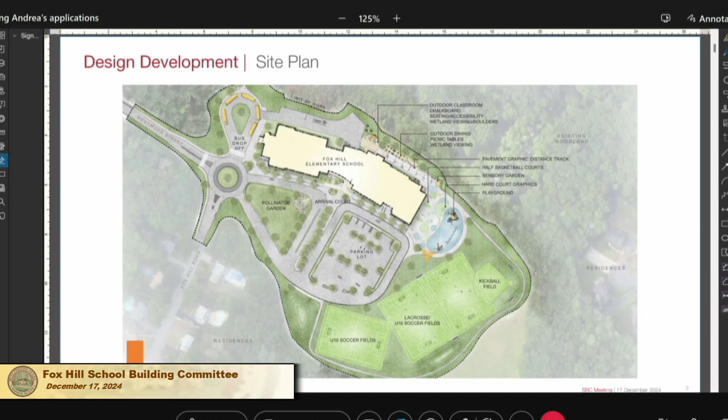site plan. Slide. Again, the traffic is very similar. This is the new alignment, so you'll notice the lines are a little bit different where the curbs are, but the traffic flow is essentially the same.

There will still be stop signs as you exit the parent drop-off loop and the van loop, as well as the bus loop. So essentially, a lot of this is the same as we've been showing it. We just updated the site alignments.

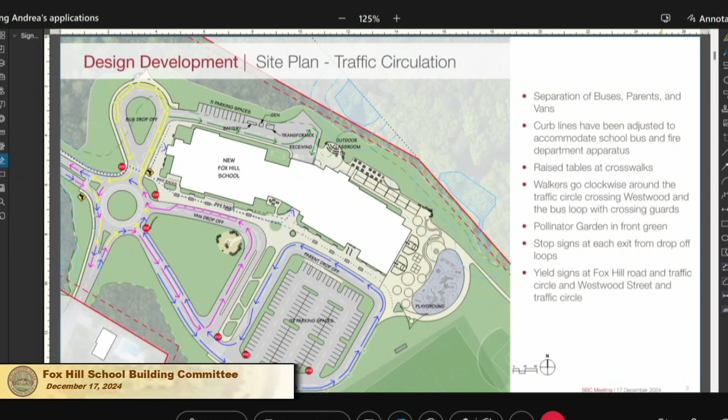Okay, next one is, so yes, we just want to give you a little bit of an overview with the updated model based on this revised site work we're looking at.

One thing I didn't mention is that we're looking at putting a pollinator garden in that triangular green space out front, so we think that'll be a great opportunity for some outdoor learning in front of the school. It'll add a little life to that green space as well.

We're also continuing to develop the site design with landscape, so this shows a very basic lawn. There's a lot of green, but it won't all be lawn. We're also looking at how to make sure the softscape, the landscape, is as maintainable as possible, as well as providing enough space for snow clearing and snow storage.

So while it looks very green, there are going to be many areas where there's just plant material and mulched area, so it won't all be grass.

Vivian, Martha had a question. Yeah, I'm just wondering,

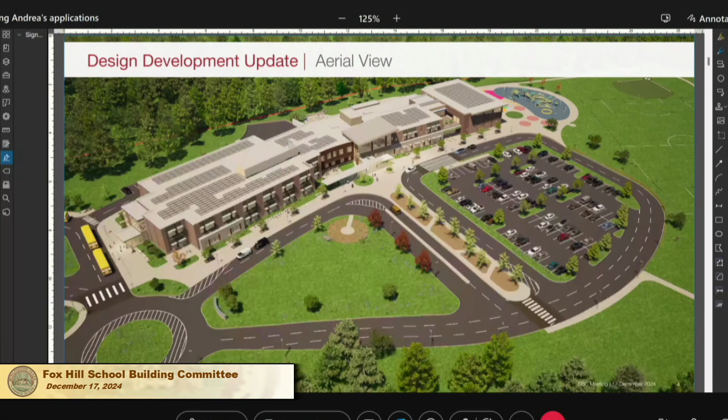There was talk very early on about trees in the parking lot, which has its appeal because trees are good and because shade is good. But if we're going to have the potential to add solar canopies into the parking lot, does that mean we wouldn't be putting trees in?

Yes. And we could put more trees in that front lawn section where you're talking about putting them, so is that the plan? Yes, it'd be trees or solar canopies.

You couldn't do both. Okay, so I just wanted to point out that I'd like to have solar canopies, and I hope other people do too. And there are opportunities, once we wrap up with the PPA and determine what the amount of production needs to be for net zero, it could be that you leave a couple of areas along the perimeter open, and then you can also provide trees in those areas.

But I think we're waiting at this point to finalize the quote from the PPA, the folks who would do the solar canopies on contract.

Okay, so my understanding is, I know this was true for residential, but you're not really allowed to install more solar panels than would provide more energy than the use of the building. Is that true for a school as well? I don't know if that's true or not.

So we still could have more, even if, and you're saying you think we may reach net zero with the solar panels on the building? No, no, no. We'd reach about 40% of building use.

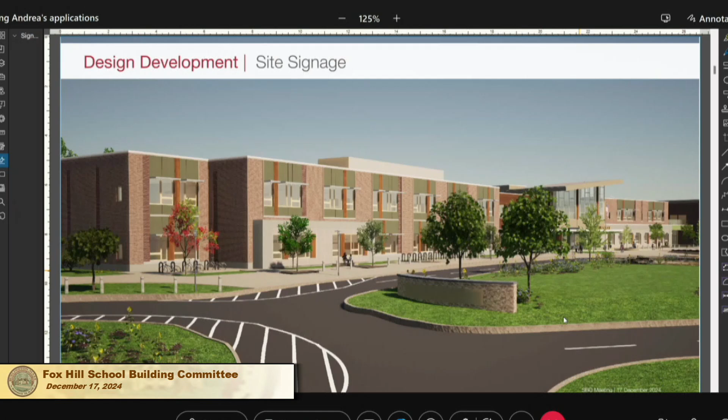As long as it doesn't look too inviting to go to the left of the sign. Unless you're just going to Westwood. Fox Hill, with the fox tail pointing that way — that would be good, like an arrow, right?

So last time we were here, we talked about different canopy options and heard some feedback from you, so we wanted to show you — we did some additional explorations. These are four new options we looked at in more detail. I kind of settled on the one in the lower right. It extends the canopy a little more towards the van drop-off, and it's about 100 feet long, maybe a little over.

Previously we showed a glass canopy, and we reached out to our cost estimator — the glass canopy would be significantly more expensive, so we've decided to pursue the more reasonable opaque canopy, built mostly out of steel. So let me show you some pictures of it.

This is kind of a view - we're still looking at the color, but you can see it'll have columns about every 16 feet, and it's about 10 to 11 feet tall. It slopes up a little bit with the structure, and we like the way it mediates between the building and the parking lot, giving a little foreground at the front of the building. That's the current status of the canopy.

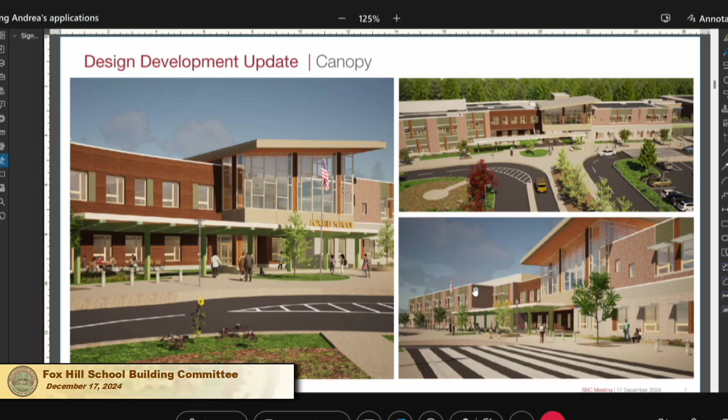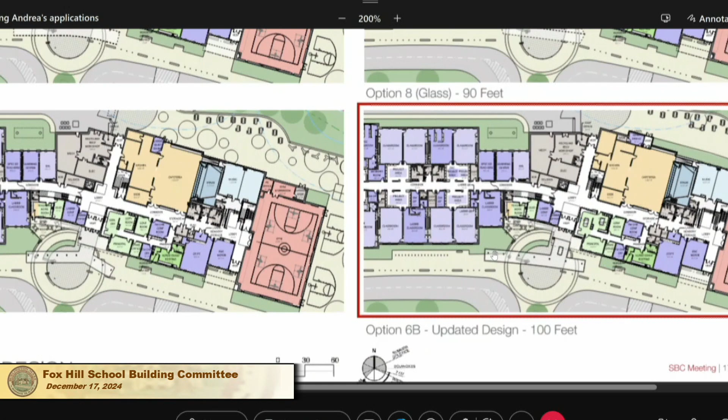No, it's freestanding in front of it. Let me go back to the plan - I just thought the way the shadow fell, it looked like it was attached. That would also give more protection, but it also makes for less natural light. The building is set back quite a bit there, so the perspective view makes it look closer than it really is. Just wanted to know what I was seeing.

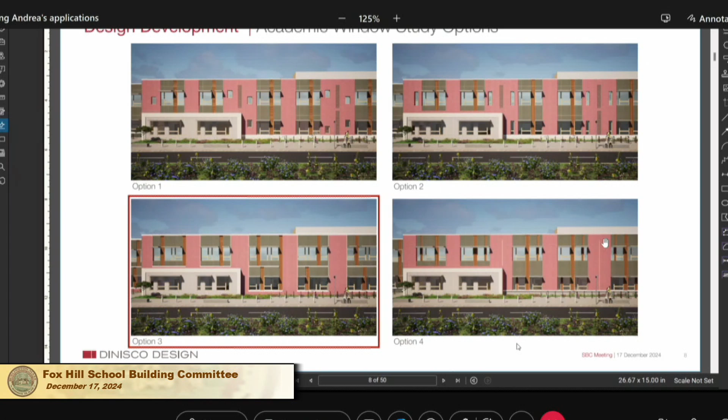For the exterior windows, we showed a few different options last time and have settled on this simpler pattern where it's mostly masonry with some metal panels and windows, with a little phenolic in between. This is the look with the horizontal sunshades we discussed last time as well.

From the inside, you get a lot of nice windows, a little over 100 square feet in the classroom, so we think it'll provide a lot of light in these spaces for the kids. They're set high enough to get good daylight, but also high enough off the floor so teachers can place furniture in front of the windows - we know there's a lot of bookcases and bins the kids use during the day, so it's a good balance.

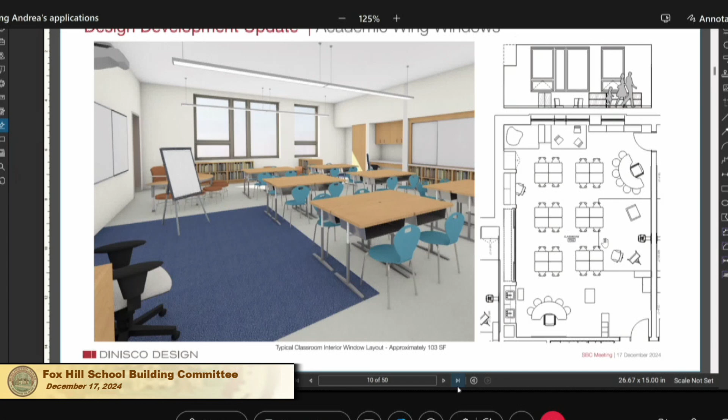What we're doing with the window patterning is looking at the most efficient layout possible while creating a bit of playfulness with the pattern. A lot of older schools have all the windows stacked one on top of each other, but here we're using the materials to break it up so it's not the same repetitive pattern across the building - it's a fairly long building, so we're trying to break up that scale a little.

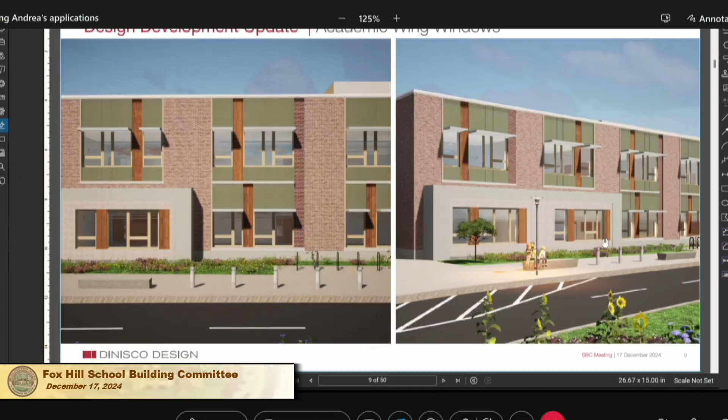So you can kind of see - through the chair, are they able to open the windows? Yes, the horizontal low one will open, like an awning window. But the other ones will be fixed, so it's a balance.

These horizontal solar sunshades remind me - is there a conversation being discussed with the PPA or whoever is designing solar panels about the possibility of solar panels as awnings? We talked about that very early on. Is that something being considered? Maybe it's a better idea, maybe not, but I want to know if it's being considered. I did bring it up with our solar design consultant, and he strongly discouraged using building elements as solar panels because he sees a lot of failures - they're not as easy to access, and there's a lot of wiring that has to tie back to other things. So he doesn't recommend it. You could do it if you really want to pursue it, but it's not as robust as the ones on your roof, which you can easily replace, and they're odd sizes too. Oh, it sounds like it's much more complicated.

We did look at that - we looked at even putting it in windows. There's some places you can put it in the glass itself.

Okay, I think last time we also talked about the bus drop-off. We've been looking at it - we made the building a little smaller because we simplified the stair, then looked at a bunch of different options and settled on this one to the lower right, which has a little less glass. This is a more developed view of it.

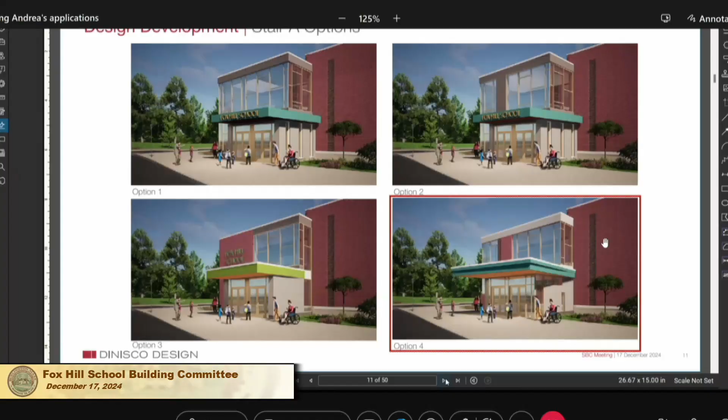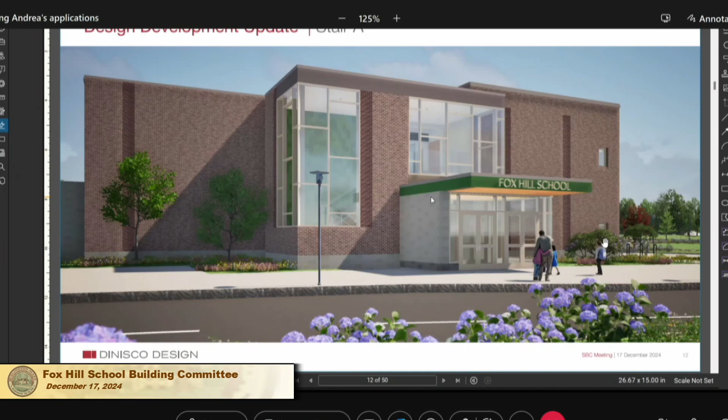It'll have a large curtain wall in the corner of the stair, and a curtain wall at the end of the corridor, and the vestibule part has a lot of glass so you can see the buses. If you're inside that area waiting for the bus, you can see out and see all the buses when they come. We thought that was important, so kids could see when their bus comes if they're waiting out there.

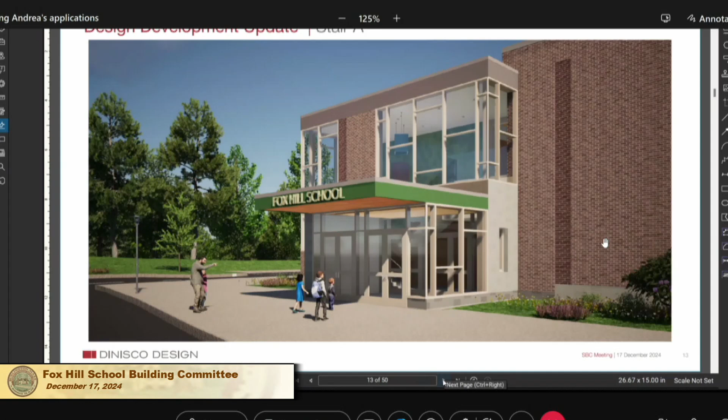So this is still developing. The gymnasium, as you'll notice, looks a lot like it did in SD. We've just kind of refined it a little bit, reduced some of the glazing.

A lot of it is the masonry. We just have a clerestory up top. We've extended the roof a bit, like a 6-foot overhang, to kind of shade the southern side so that during the daytime you don't get

glare in the courts, which we know is a big problem. So there's a couple of little punched openings down low, so when you're in the gym you can still see out and see some of the sky. And I think we've also adjusted where the doors are out of the gym so they're less in the way of the basketball courts. So they're more towards the corners. Those are the 2 doors needed for egress from the gym.

Question through the chair. I know, like when we toured the school over in Woburn, Hurld-Wyman, the gym gets really hot. They were complaining about that. So when you talked about the overhang, is there something to shade those windows to keep the sun from coming in and beating? Is there something we can do? I don't know, electronic shade, something to keep it from getting so hot?

We have in the past done stuff like woven stainless steel mesh on the exterior, like a fabric. It looks like a fabric almost, and that can cut down on the solar gain on the window. You get a 50% opening of the metal, so you're kind of cutting down 50% of the heat that comes in there.

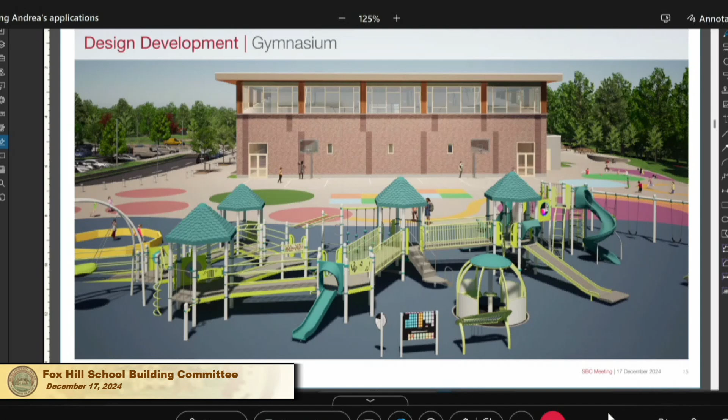Okay, what's next? So we did a little bit of development. This is the cafeteria. I think last time we talked about trays. So we went back to our food service consultant, and he quickly revised the kitchen to figure out what it would take to do a tray wash. Essentially, for trays you need a conveyor-type dishwasher, which is a lot longer, so we had to reconfigure the kitchen a little bit.

So what we've done is taken the reconfiguration he did and used it as a base. You don't have to decide yet if you want to do tray washing, but this will allow you to do it in the future.

It really didn't impact the size of the kitchen much, but it did push the quiet dining out of the building a little bit, about 5 feet. So the volume of the quiet dining came out of the building, and we also added a vestibule so that when you leave the gym or the cafeteria, you go through a vestibule so you don't let all the warm air out of the building this time of year.

At the working group, someone had a great idea: maybe we add something to the quiet dining so it's not such a fishbowl. So we're looking at maybe some kind of frosting or a pattern on the glass so it's not like you're in the middle of a fishbowl.

Question: on the tray wash, is that the only thing we'd wash, trays? No, you'd still be washing everything in there, you just need a conveyor dishwasher. So you'd wash flatware, dishes, and all of that. And you'd have a 3-pot, or 3-bowl, sink in there as well.

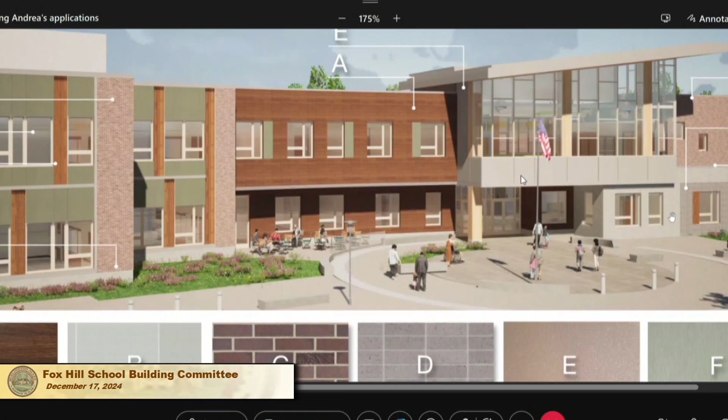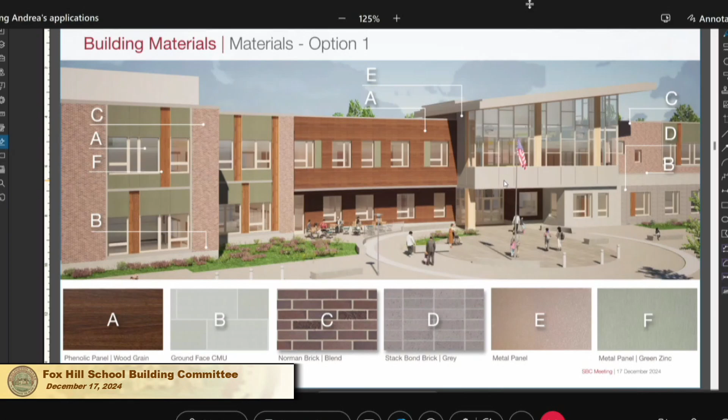Is that also particularly sturdy at the bottom, concrete? Yeah, the concrete's actually pretty sturdy, more sturdy than brick down low, so we like it there. Then the last materials, we have a little bit of gray brick at the kindergarten bump out, and also in the admin area, this color. We might do it in a stack bond, so it looks a little different.

You brought a concrete block over to the chair - there's a concrete block on the floor. Where's that go? That's what that will turn into, right? We have a few spots of dark brick base on the backside. Okay, you don't have to pick that up. You're very brave - bend with your knees. It's only about 15 pounds. But this slide shows them all, though it's better to look at the real thing.

Okay, so we did do a little bit of playground update. Megan O'Brien put together a fourth option, and I think we've shared it with the town, so we just need to decide what we want to go forward with. I think this is the one everybody seemed to like, because the playground's divided into 2 large play structures with some swings between them, plus 5 to 6 independent little structures that spin around or are kind of seesaw type things. The taller, bigger play structure is geared more towards the older kids.

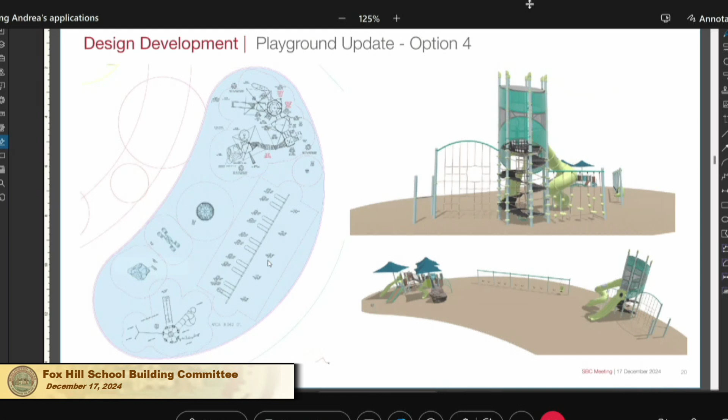That's the smaller one to the left on the lower picture. And then the taller one is geared towards the bigger kids. But I think the intent is that all the kids from kindergarten through 5th grade are able to use both - it's just a matter of how much challenge they want. The structures meet the accessibility guidelines, so folks who aren't able to use their legs effectively can get on and scoot from one level to the other. It's just not 100% accessible for wheelchair access.

We're still looking at all the separate components - there are many different ones, but this is very close to what the school wanted. We met with David and some folks from the school department, and it was really desirable to have structures that are a little bit more challenging than those that are just kind of walking from one bridge to the other bridge.

So that's how we landed on 2 structures. The swings were also really important, so we have a lot of swings there in between the 2.

As Neil said, the freestanding elements are components that David will share with the staff, and they can provide input as well as sharing them with the students. There's an opportunity after the holidays, we'll figure out how to post it so the kids can actually vote to see which components they like the most, so they can participate in actually selecting some of these elements. This is kind of like the group of elements.

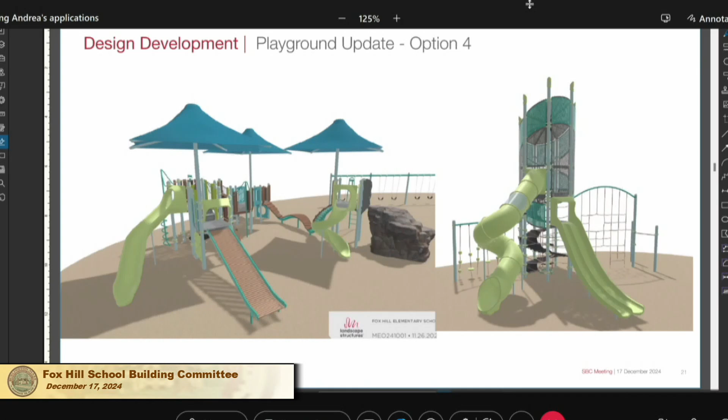Right, and that's important. And also for our staff, it's fascinating too, some of the stuff they've developed. At Francis Wyman, we have a merry-go-round that has a seat that a wheelchair can roll right onto. I've heard some of the teachers enjoy playing on it too, so it's fun for all ages.

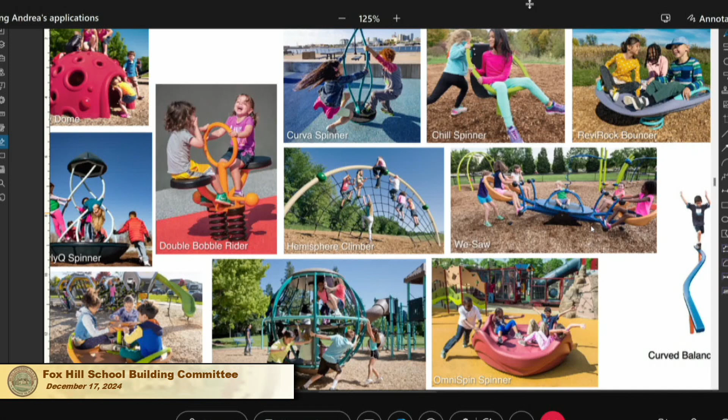So on the screen are many of the freestanding elements, and one of those merry-go-rounds would be a potential option. Have we thought about a platform swing, where a wheelchair can ride right on instead of a student needing to be transferred onto a swing? There may be some of those options, so let us dig into that. There are merry-go-rounds like that too, yeah, the one at Francis Wyman, right.

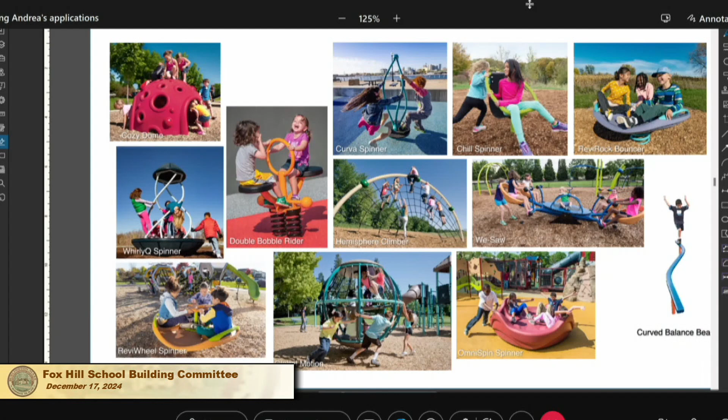I've seen a big mesh globe that's an inside climbing rope structure. I don't know how that fits in, maybe with the one in the center there. Yeah, I mean that looks plainer. Well, it's not plainer, but anyway, that's the idea. They have a lot of equipment, so we'll definitely give the feedback to Megan. She'll be happy to give us some more options. There's more ideas than we have room for, and money for.

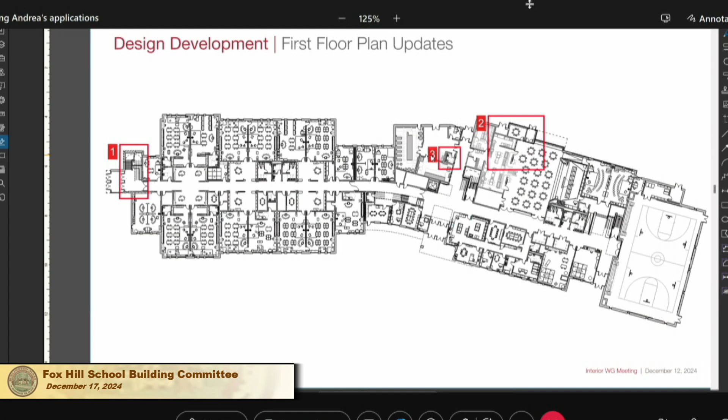All right, so we're going to move on to the interior a little bit. We've talked about some of the plan updates already. We've made stair A, the farthest to the west near the bus loop, a little bit smaller. We've also made tray washing possible now in the kitchen, so that made a change. We've also reconfigured the bathroom in the loading area, so it's a little bit more compact than it was. Those are some of the minor changes to the plan.

These plans really are slow to load.

Stair A, this is an interior view, like when the doors to the bus loop are on your left, on the left picture. As you go up the stairs, you can kind of see that corner curtain wall I talked about earlier. We'll probably design a nice bench waiting area right there, so you can easily sit and look out through the vestibule for the bus.

To the right is a section cut right inside of the vestibule door. This gives you a sense that when you're at the corridor coming down the hallway, you'll have this nice double-height space right as you get to the end of the corridor with the stair to your right. We'll have this nice green wall that we're thinking about maybe doing some sort of graphic on, or maybe just a nice material or acoustical pattern. That's kind of a special wall for this end of the building that we're going to do a little more design work on.

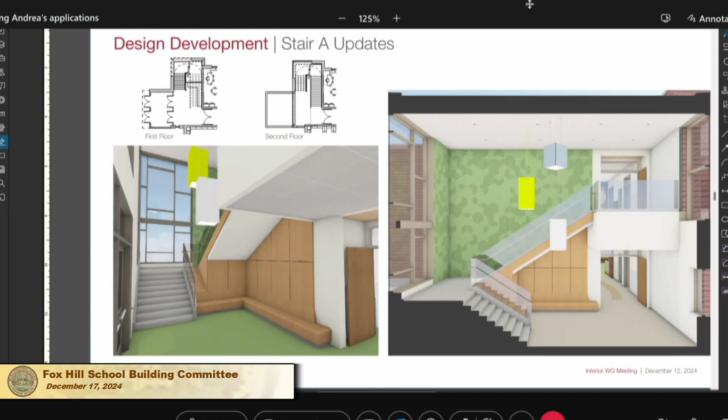And the colors that you see are not the final colors. They're there to help visualize what the space might feel like. We're still at the start of looking at colors, only because we're looking at materials, and these materials have certain limitations on color. It's a bit of an iterative process where we're going to be going back and forth between colors and materials.

As we talked about previously, I wanted to show you the plan so this is how the pot wash would be configured if you decide to use the trays. You'd have this large conveyor-type dishwasher, and it needs a huge counter to the left of it so the trays can go out and have a place to sit, plus some required storage. But if you decide not to use trays, we can put in a smaller dishwasher, which would free up more space here for storage racks, which every kitchen needs more of.

So when we open the school, we could design it so there's an overhead door that would open up the counter for the kids, just to have it in place. That gives you the option, or if it's decided not to do that, we could omit it. But at this point, we would put it in for pricing purposes.

Then you'll see there's this little pop-out area, so the quiet dining got rejiggered a little bit. It got pushed out 5 feet, so it actually has a little more window, a little more daylight coming in. As Neil said, we swapped out some space by reducing the size of stair A and allocated that space to the vestibule. In the wintertime when kids are going in and out, that's so much better than just having the door open and a rush of cold air. So in terms of interior comfort for folks, this works a lot better.

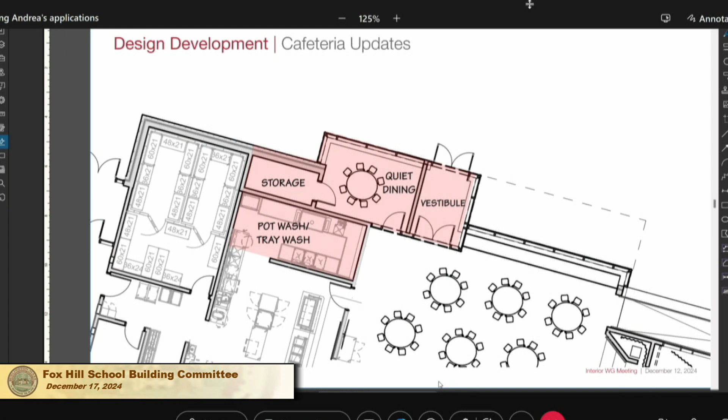That storage seems hard to get to — is that deep storage? You could get chairs in there; it's 5 feet wide, so it's not a huge storeroom, but it's space we couldn't use in the kitchen. There are 2 doors to get to it, so it's kind of a bonus. It was because of the way the kitchen's now configured, we couldn't really use it, so we'll continue to look at how to better use that little space — bonus storage.

Sensory — too loud in the cafeteria.

2 doors. Yeah, I don't care how many doors, as long as it's not a loft attic space.

So this is a view of the dining room where you can kind of see the vestibule and the door to the quiet dining. To your left is the serving area, and the two barn doors are partially opened into the servery. You can also see there's a glass transom, so there'll be some natural light getting into the servery as well.

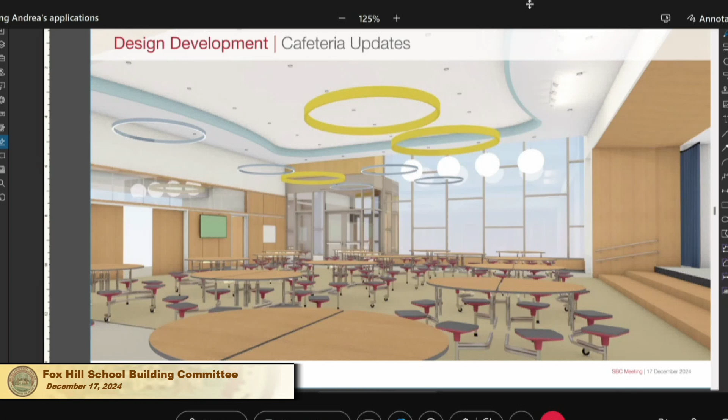Quick question though, for the cafetorium and the stage, do you know what the height of that's going to be? Because at Hurld-Wyman the parents were saying it's hard to see when there's something going on. I mean, I realize there are risers and things like that, but did we think about that? It's 18 inches.

Typically we do 3 steps up, so the steps are also used as risers, but the higher we go, the longer the ramp needs to be, so we're always constrained by the space and by the MSBA formulas. We find that 18 inches gives us what we need, and then we have to have a ramp that's just a little bit longer than 18 feet, so it all takes space.

We could maybe get it a bit more, well, let us look at it, but it is a challenge because of how the platform is configured. You can actually get to it from the music suite as well, so there's another ramp on that side and it all kind of works together. The music rooms can become like a green room when there are performances, creating a nice relationship between that area and the platform. But yeah, 18 inches is kind of the sweet spot.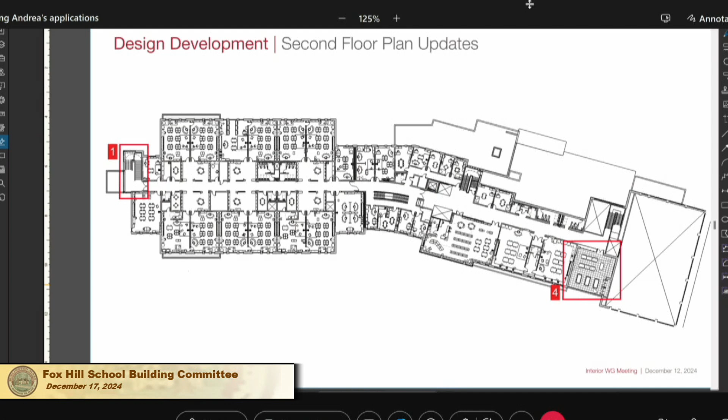The rooftop, I think I have a slide that shows it. So what we've done is we had this space next to the gym that was just a cavity, so we've kind of taken that over. Now we have a little bit of an alcove and also a couple of storage closets out there. I think that's a good spot for storing the benches and the chairs and furniture in the wintertime.

And we're also looking at maybe doing some sort of fabric shading device so it's not so sunny there, because it could be quite hot there on a hot day. It's all contained and southern facing.

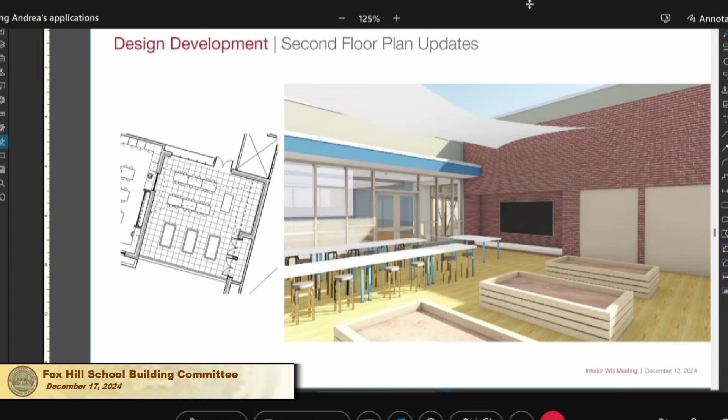Warm, yeah. Well, we like that today, wouldn't we, or this past week. All right, so we're just going to talk a little bit about...

So we started looking at colors and the interior design. We've tried to use nature as our inspiration for this project, especially because you're surrounded by beautiful woodlands and wetlands and vernal pools. So we've looked at some of the things that are in the wetlands, the colors you might get out of it, and some of the animals that are in there, like the salamanders.

And so we've developed a palette for each of the grade pods based on those colors. We start at the lower floor, which would be like kindergarten, first grade, and second grade. We're thinking of that as more like the forest floor and the vernal pool area. Then the upstairs would be more of the tree canopies in the sky, so those are the colors that inspire the upstairs, the tree canopy in the fall.

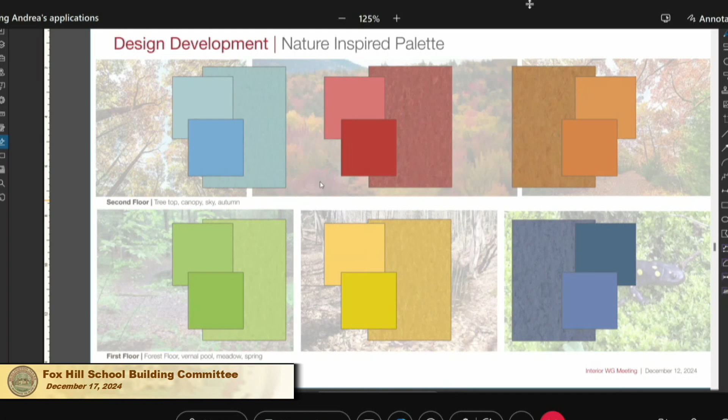And in the fall, well, we have to get red in there somehow. Yeah, so the first...

Floor, so for all of the building we have a lot of neutrals. Most of the corridors will be these 2 linoleums, mostly the lighter one with some accents of the camel-colored one. We'll have some wood that's red oak, and the tile we're showing is more of a white, off-white tile on a lot of the wainscoting in the corridors. So there'll be a neutral background for most of the interior, with accent colors in the project areas and some feature walls that we want to highlight.

Pass them around. We can get up after. Yeah, we can get up after. Show and tell afterwards, right?

Afterwards, yeah. So the first floor, yes, there's green. I think we're showing that in the kindergarten. Yellow is first grade, and then this periwinkle blue is in second grade.

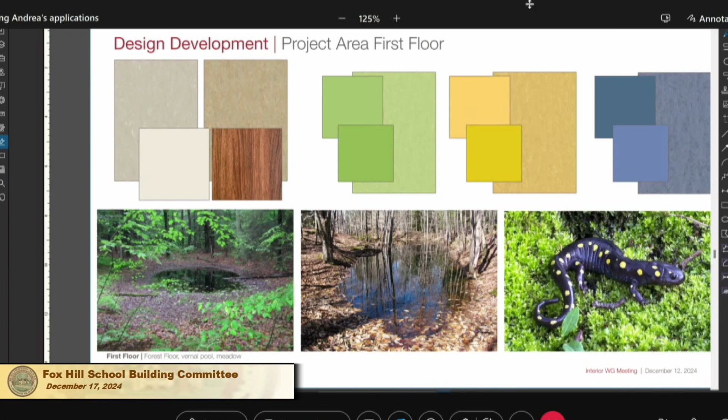Do we have to have that lizardy thing? They would love that. Salamander? Is that what it is? You don't want him. He's native to the vernal pools of Massachusetts. Maybe we could just put his picture on the wall. You don't want him to be the new mascot?

They're very little. And then upstairs, again, the neutral tones on the upper left, and then it would be more of a sky blue for fifth grade, more of a reddish color for fourth grade, and orange for third grade.

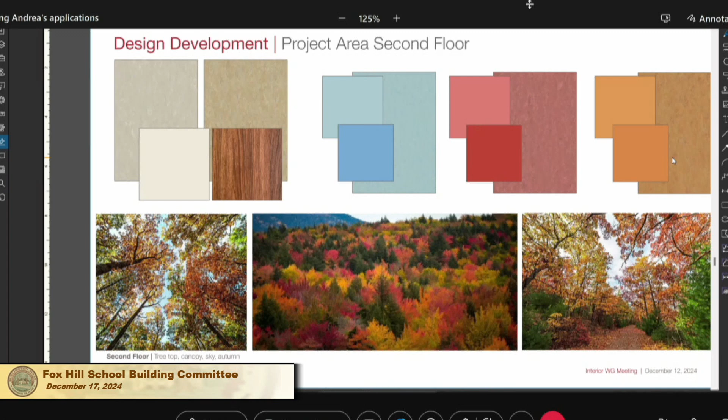We could also move them around. Yeah, we could definitely move them around, but.

So this is sort of a first pass at what it might look like in a typical project area, so we would mix the colors. It wouldn't be just one color in each project area. We have maybe the majority of the color is the one that's the project area's color, but we do splashes of the adjacent colors

so that it's not a monochromatic space. So you can kind of see stripes of the other colors in these renderings. We want the kids to be able to look down the corridor and see some of these main colors, so they can say, oh, look, there's my homeroom. Yeah, it gives you a little bit of wayfinding in these corridors. Okay.

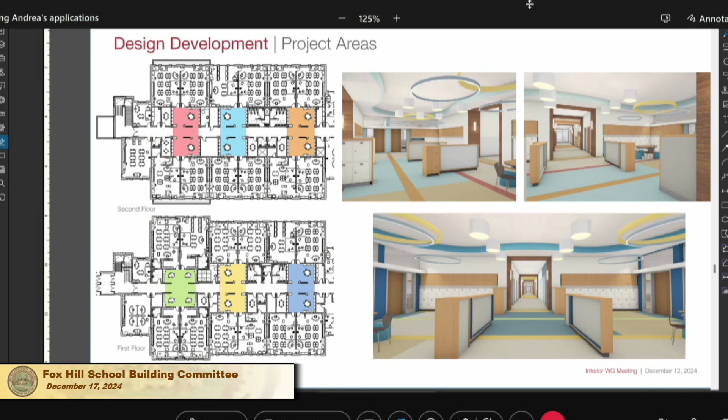There are a lot of two-story spaces in this school. It's great, it's a two-story school. We're able to open up floor areas so you can connect the two levels. But having two stories, we have large swaths of wall.

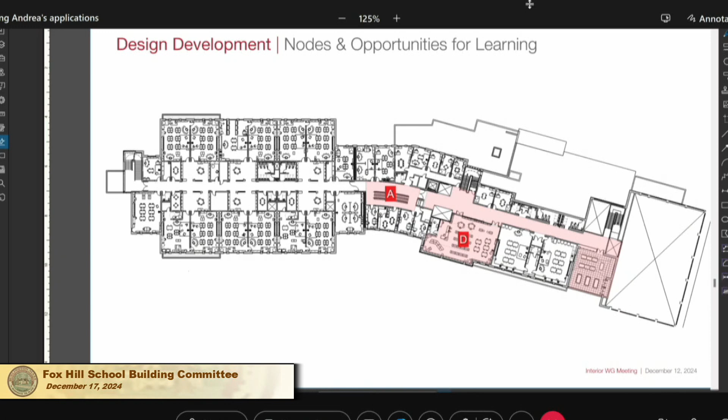So we're working with a graphic designer, and hopefully in January we'll have some concepts to share with you where we can use these walls as learning opportunities. They might be large environmental graphics that have science information or information about Burlington in general or the surrounding areas. So there might be some passive walls. The challenge is always to put something up that is always fresh, and when it's a big graphic, you're not able to really refresh it.

So we're going to intersperse that with potentially some monitors that can project information. We talked to Dennis, thank you Dennis, about programming some of these monitors so that they could be projecting a program, or information about the building, how much electricity is being generated, how much water is being used, et cetera. So there's really great opportunity in some of these spaces, and that's why we're calling these nodes potential opportunities for learning.

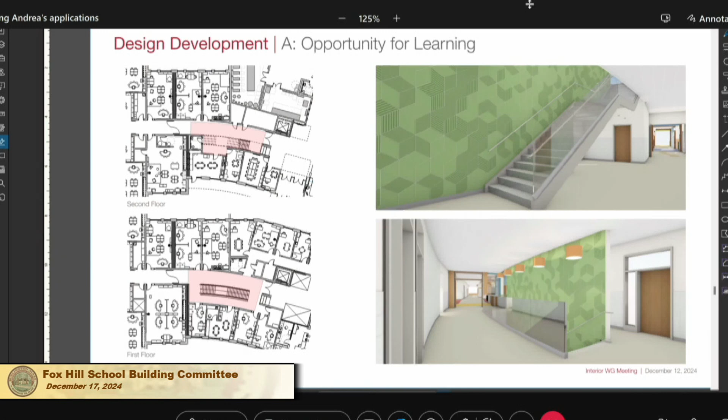That's the first one. And the second one is the main lobby, I believe. Let's find out. Yep, there it is. So when you enter this main lobby, you look at the picture to the bottom left.

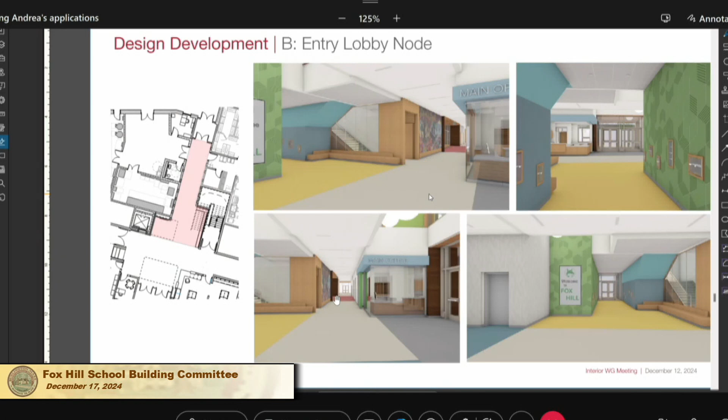So the front doors are to the right. You see the desk in front of you, just to the right of the doors. And then down that long corridor is the gym at the very end. And then to the left, you'll see the stair up to the library. So there's a lot of opportunities here.

One of the main things we want to do is connect you back to the outside, out back where the outdoor learning is. So we're working on that corridor, the upper one there. The lower right-hand picture is your link to the outdoor learning, and you could go directly to the playgrounds that way as well. When you look out that way, you'll see the woods and everything. It'll be a nice view.

So what you see there is a large monitor that's vertical, so that we have the opportunity to partition and provide different information on different parts of it. And what we want to do is bring people down around the corner and have a nice environmental graphic with a batch of display cases mounted at different heights. We want to activate that - it's a corridor, and we want folks to feel like, oh, this is a fun corridor.

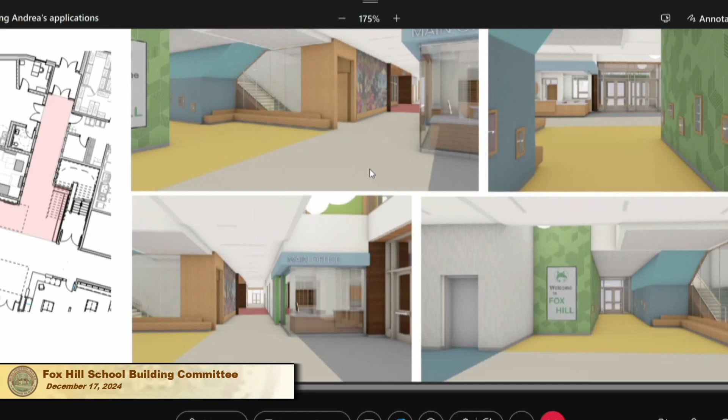We're going to go down to the outdoor learning area, and we're going to have even more fun and learn about the wetlands, learn about the salamanders. But these display cases will provide an opportunity for the kids to participate - maybe it's an art project, maybe it's the theme of the month. So it gives them an opportunity to put some of their work on display, and there's a sense of pride with that too. It also provides the science program an opportunity to add more information.

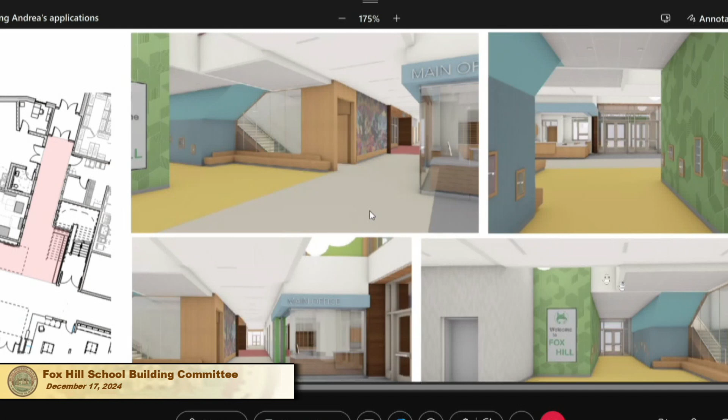I don't know if they do stuffed critters, but we thought it'd be nice to have one larger display case also where they might do a diorama, or maybe one of the classrooms each month gets to use that display case. So there's a lot of opportunity for the kids to really collaborate as a grade or as a classroom to use this wall, in a passive way, but hands-on in different ways.

And would this be an area where we could add information about the sustainability of the building? Yeah, absolutely, we're thinking that main wall could have a whole educational piece that's scientific. I know other schools have done it, so I think I hope we will.

We're going to have many systems that we can feed into a program, and that will kind of be a snapshot in time. We're suggesting we have a weather station of some sort, so again we can bring that information in as well.

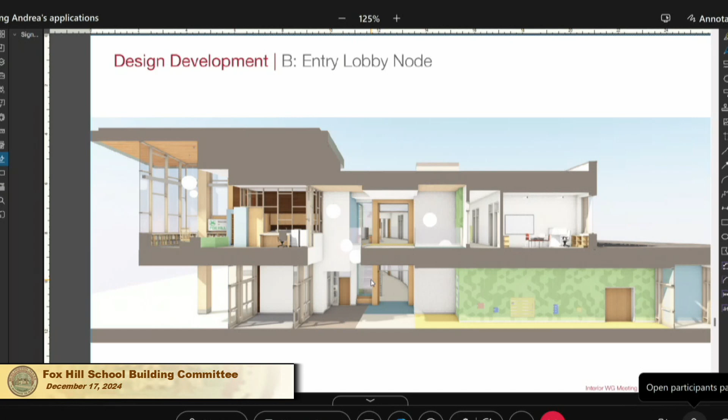To be specific, to have a display - how do these geothermal heat pumps work? And how do the solar panels work? And I don't even know if there's any water preservation stuff in this building, but if there is, to show that, and how the triple pane glass protects both from too much heat and from losing heat - all those things can be displayed as part of the educational program.

Yeah, definitely. I think the big monitor is a good way to do it, because you can write programs so that you could change it up as you go, since a static display kind of gets a little bit tired.

So I just want to show you a section through here, so it gives you an idea of the connection - to the left side is the front doors, the vestibules. They're right below the library, so as you'll notice when you come in the front door, there's a double height space that really is connected directly to the library with a glass storefront.

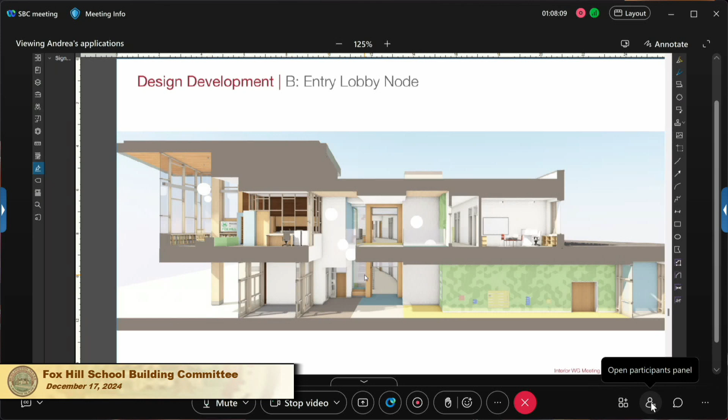And then you're kind of right in line with that corridor, with the green wall will be the graphic we were talking about. And then part of that graphic turns the corner and goes up to the second floor. But the idea is to really stitch this whole area together so that you feel like you're connected to the outside, and you're also connected to upstairs, so it's like a real node, a real center of the school.

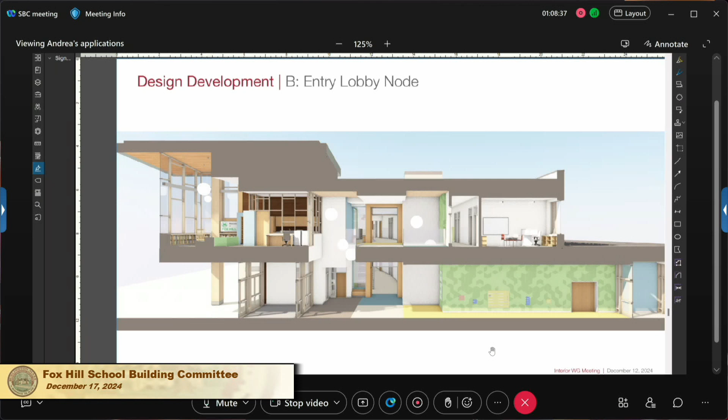We now have 4 or 5 schools that have worked with a local artist who comes in and develops a vision with the principal and staff, and works with the kids during art class. They help clip little mosaic glass tiles, and he puts it together in panels, mesh panels, and installs it on the wall. This happens toward the end of construction, but it's fully coordinated, so when the school opens, this beautiful image is also completed. It's really quite beautiful.

And it'd be a nice feature right near the entrance—a great opportunity.

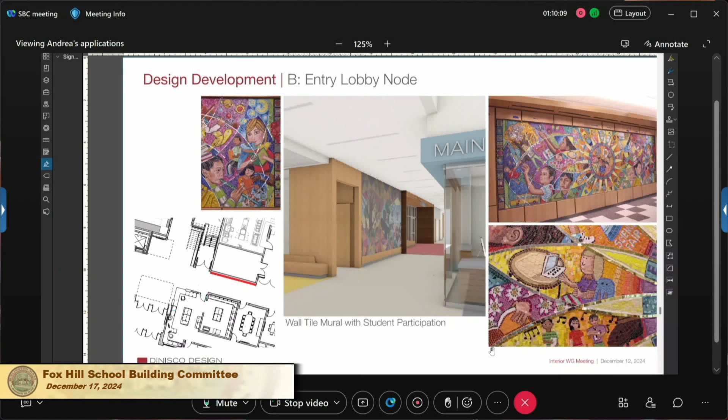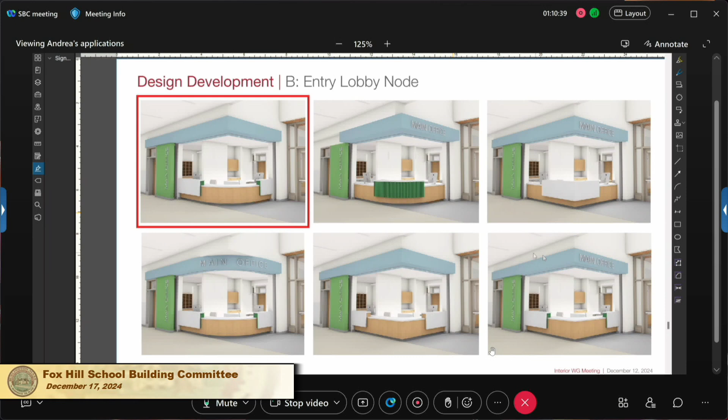Is there still the drive-through window in the vestibule? Yes. You call it a sally port—when you come to the front door, you basically need to be buzzed in, similar to what we do now.

Kristen will say, 'Who are you?' Or, 'You look familiar, okay, come on in.' But you can't move any further into the school because there's another set of doors you can see on the right-hand side. Those are locked until you check in, so there's another window in that vestibule where Kristen or someone else greets the person to ask who they are and what their credentials are. There are programs where you can check credentials and issue a badge. It's similar to a bank, where you slide the credentials underneath a little slot—if they pass muster, they come right on in.

Once you're in, we want this to feel as welcoming as possible, even in the vestibule. It's different than what you have now, where you come in and you're actually in an office before you go into the school. This really makes the reception admin area part of the school and part of the action.

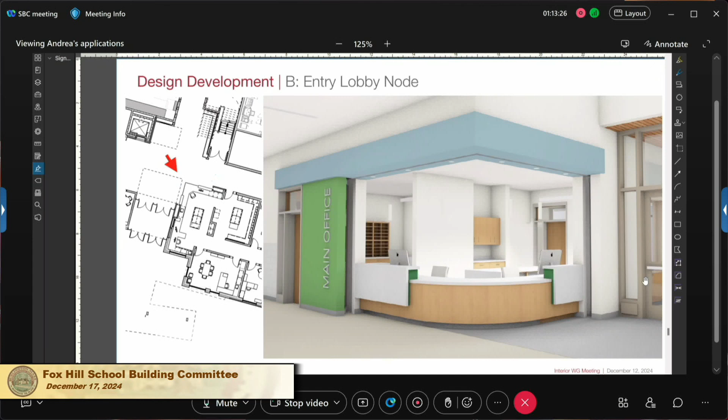Almost done, almost done, yeah, sorry. Okay, finally we get into the music lobby.

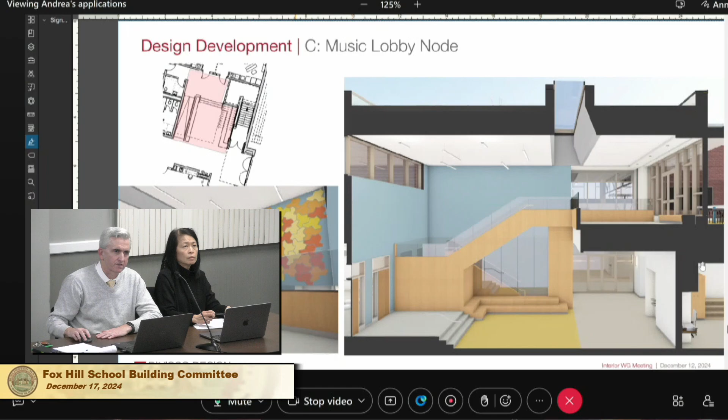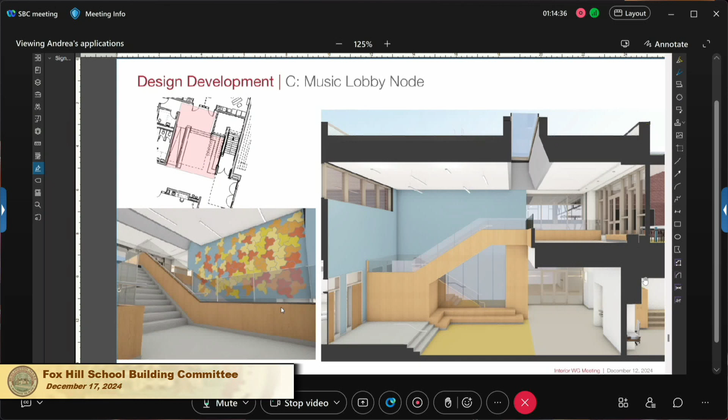It also brings you right out to the outdoor classroom, at the top of the stairs to the right. So we have a couple of big walls here, and one of them we're thinking of doing some sort of acoustical panel pattern. Right now these are called Einstein tiles, like repeating tiles. We would make them out of acoustical felt or something, but it might be a learning opportunity as well, not just a nice graphic. It also could be a graphic if we decide to go that route. We're thinking it'd be nice to have something a little more colorful.

These are a couple other views of it, and we think we'll probably wrap the corner with the acoustical panels. We want to do a bit of sound absorption because it's such a high space and it might get a lot of reverb.

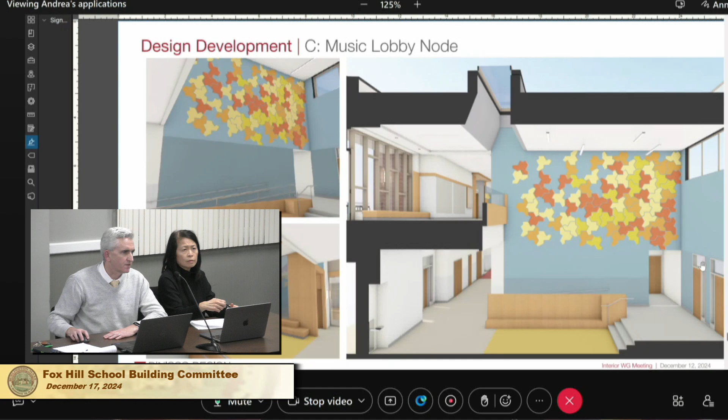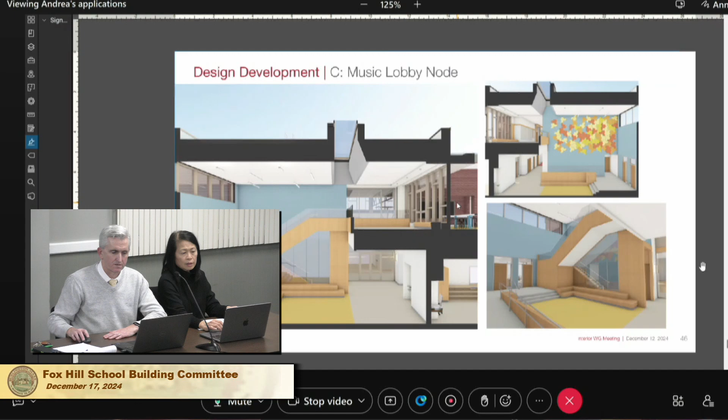Did you do this? That looks... yeah, you can do it. Okay, so just more views of that.

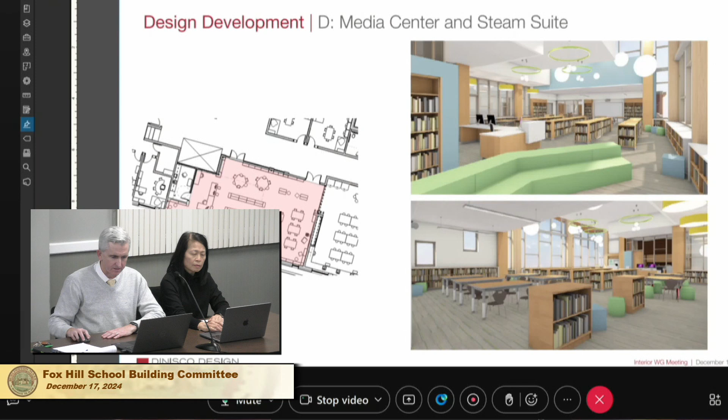This I think we've seen, but you can point out... yeah, so this is the library. We talked about this earlier, how it's connected directly to the first floor through these openings in the floor.

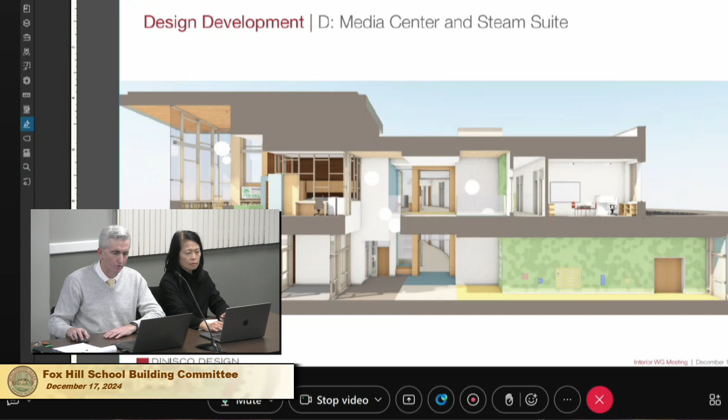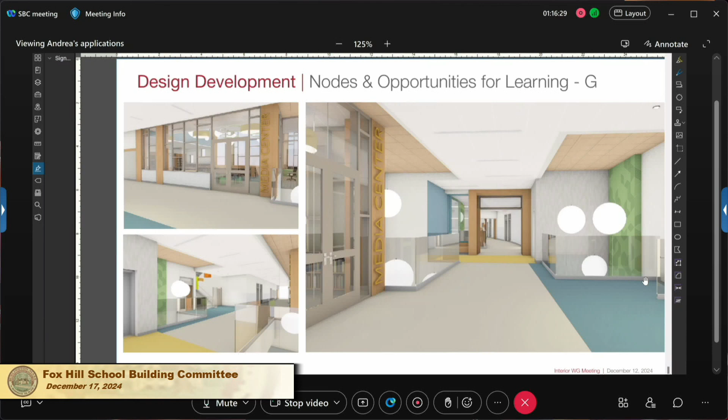That is it, and that might be it. Yep. Read it. Okay, thank you. Thank you for carrying, sorry about the length, we have a lot to share. I'll give you back to the PowerPoint.

Okay, moving along, we have completed and upcoming meetings. Here's a list of things completed in October that we went through at the last meeting in November. We were able to complete two kitchen meetings, the design follow-up where Dinisco discussed the added space of the warewash machine. We'll have a more specific meeting about that down the line, but you know you have the space for it as of now. We had another exterior working group and an interior working group kickoff meeting, and can't see that last one.

Traffic, which we had today, we got great feedback from some town community members and will need to meet again on that. To be scheduled: solar, which was brought up today, thank you Martha. We need room data sheet reviews with DCM, planning, Concom in both Burlington and Wilmington, DPW and engineering, and Board of Health. We'll be touching base with all of them over the next month or so. Does anybody have any questions about those? None?